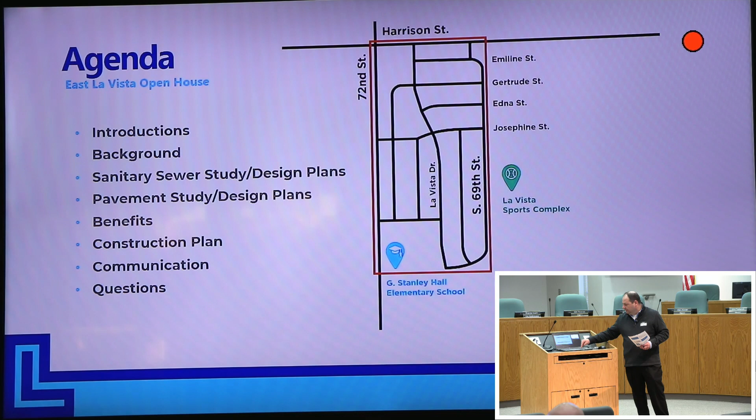As far as introductions go, we have a handful of people here tonight who will be speaking, and others just assisting. From the City of La Vista, we have Jeff Callentine and Pat Dowse, one of our city engineers. With NL&L Concrete, who will be out in the streets doing a lot of this work, we have Chad and Mike sitting up front. We also have Bill Glismann with HGM, one of the design engineers on this project, and Paula Pogie, who will be the project manager and construction manager. With TREKK, who did a lot of the studies for the sewer and pavement, we have Brock. And I am the public engagement moderator.

With that being said, I'm going to hand it over to Pat, who's going to give us a brief introduction on the background.

Thank you, Brian. I appreciate that. Pat Dowse, City Engineer. Thank you again for everybody coming tonight. If you were here in November of 2021, you've probably seen this slide before, and you guys live this slide every day. This was SID number 4, Sarpy County, built approximately 1959 to 1960.

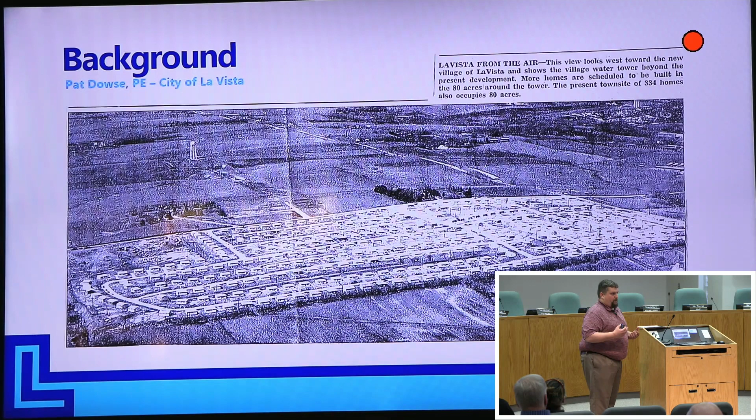As you guys are well aware, it's been there for a few decades. Back in the early-to-mid 2010s is when the city started looking into this and putting it in their program, understanding that the surfacing of the pavement was getting poor. We understood through our jettings and inspections that the sanitary sewer line needed some help as well. So in 2019, we went out for our professional RFP and selected HGM Associates and TREKK Design Group as the design engineers for this project. We went through the study to understand the ins and outs of what the project needed to be.

We understood what the next steps might be, and hired them back in 2021 to do the final design as they worked through. We then met with the neighborhood in November 2021 at 60% design to give everybody an update on the project, show where we were at, and discuss what the next steps were going to be.

So here we go, we get into 2022. The bidding climate was a little less favorable than we were anticipating. We bid it in February 2022 and had no bidders. We bid it again in May and had one bidder, substantially higher than what we were estimating. We bid it again in October and had two bids, which is where we came with NL&L Concrete, who became the low responsive bidder. We have signed them on contract, and they are ready to go.

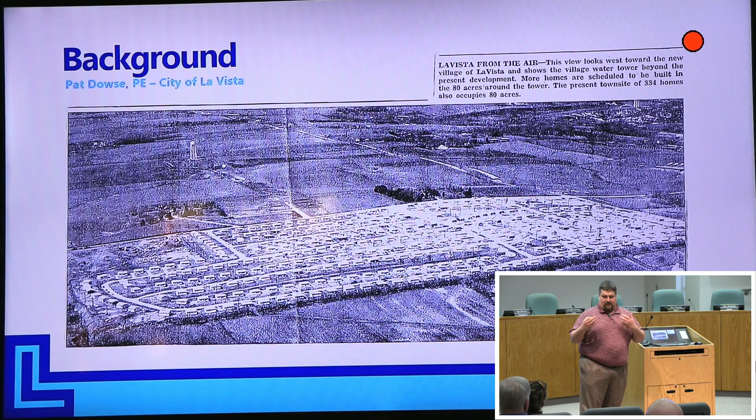But yeah, I think you guys know the neighborhood pretty well—72nd Street, Harrison Street to the north, to the south is G. Stanley to the east is the sports complex. And like I said, as we've explained then and explain now, the goal of this project is to extend the sewer life 50 years and to rehab the pavement.

They'll talk a little bit more about the background. You'll hear some terminology in there—laterals versus public main. The lateral is what connects to the public main, from the main to the house, so that's the service lateral. The main, or trunk line, you may hear that as well—that's the main generally in the middle of the street.

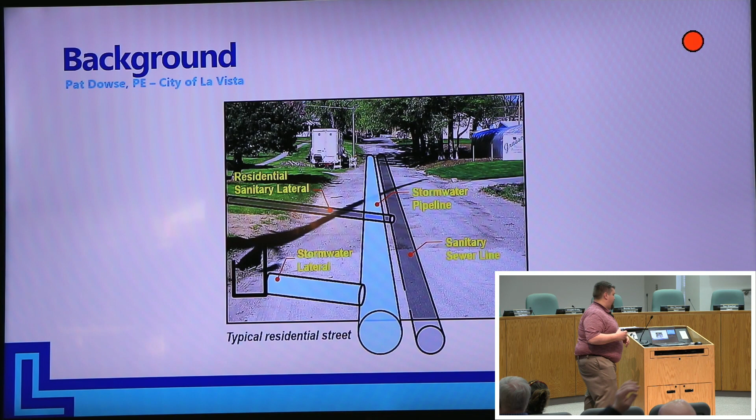I will turn it over to Brock for the sanitary sewer. All right, my name's Brock Beran with TREKK Design Group.

We had a couple of roles in this project. One, we did a lot of the sewer analysis—televising the sewers, inspecting manholes, things like that—to determine the condition of it. From there, we rolled into the rehab recommendations, and then from there we got into the design of it.

As Pat mentioned, there are two types of sewers: storm sewer and sanitary sewer. The way I describe it is the storm sewer, if it rains, goes into the curb inlets and runs right to the river. The sanitary sewer, when you flush your toilet, goes to the treatment plant, gets cleaned, and then into the river. So those are the two different types of systems. This project dealt with the sanitary sewers, and this shows you a map of where everything is at.

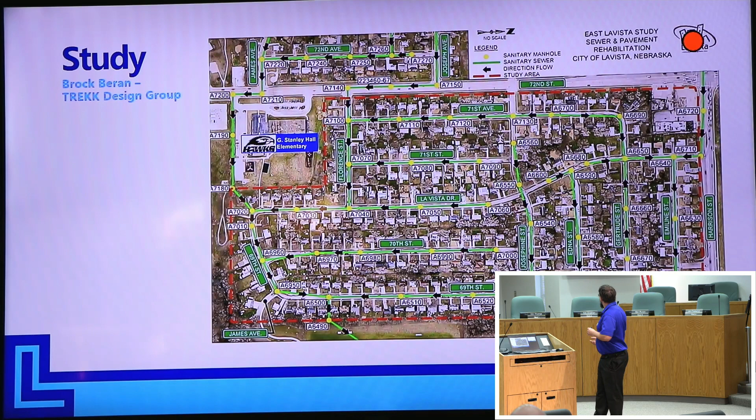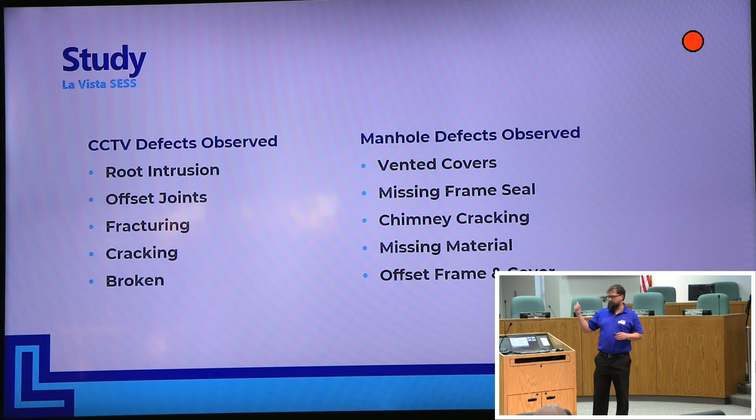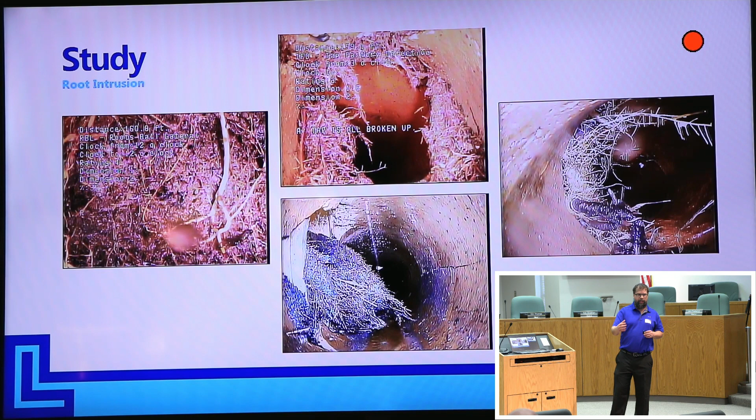What we found during the inspection was just lots of defects—cracks, broken pipe, lots of roots. When we got in there, we noticed a lot of issues with people's laterals where there's roots inside of it. Originally, we weren't going to address those, but once we got into it, we realized it was more severe. So we're taking the laterals out, and we're going to remove and replace them out to outside of the pavement.

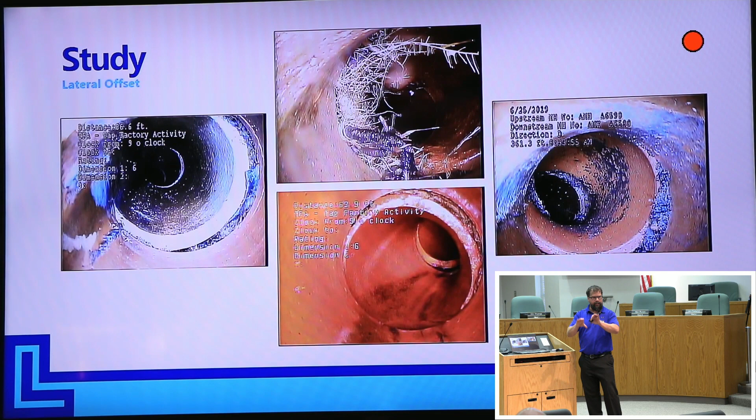So as you can see, there's lots of issues—offset joints, some objects stuck in there. That's somebody's jetter nozzle. Just more of the same lateral defects, a lot of offset joints. Basically the pipes are disconnecting a little bit, so there's offsets there. As you can see, there's cracks and broken pipes, things like that. There's actually a utility that bored through one of the pipes.

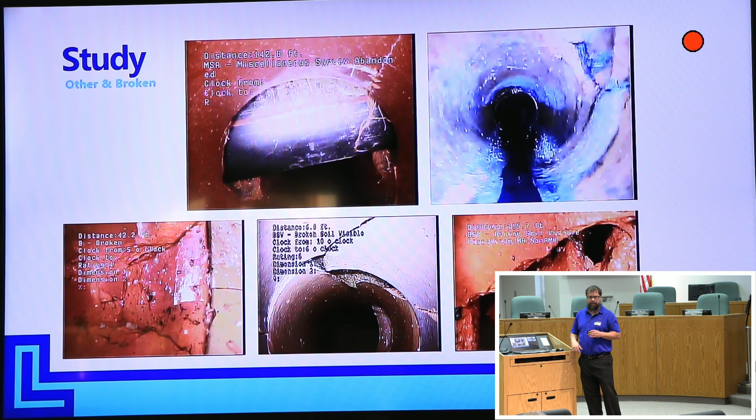So what we have is to address this stuff. Oh, and here's some of the manhole issues—just lots of work that needs to be done to patch those up.

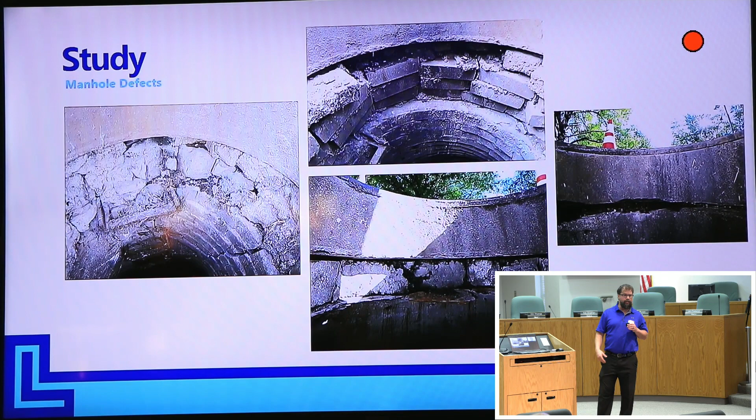What's happening is you're getting I&I, inflow and infiltration—clean water that's getting into the sewer system. So if we can fix those things, that's going to reduce that clean water getting into the system that we're paying to clean.

As far as the design of the sewers, this is kind of more of the same. So what we've recommended is cured-in-place pipe. Basically it's like a sleeve that we're putting in the pipe. If there's cracks or small holes in the pipes, things like this, the sleeve will go inside and reaffirm the pipe integrity—it'll give you that strength. It'll cut out the inflow and infiltration, the water getting in through those cracks, things like that.

So again, we're going to remove and replace the laterals. Your private lateral will be replaced from the main to the outside of the pavement, and then once the pavement's in, we'll come back and line the mains.

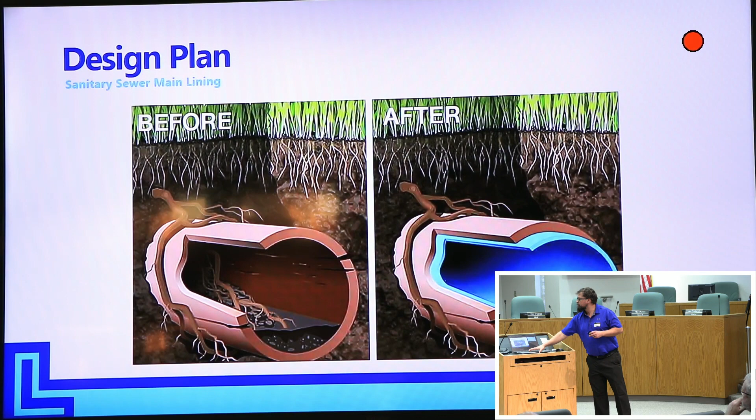So with that, I'm going to hand it over to Bill to talk about the pavement. Thanks, Brock. I'm Bill Glismann with HGM Associates, and we did the pavement study and design for the project.

Initially, we did a study—went through all the streets, took a look at them, used a rating program to go ahead and do that. As you can see here, most of the streets were in fair to poor condition. Actually, this was several years ago, so maybe more of those are poor now.

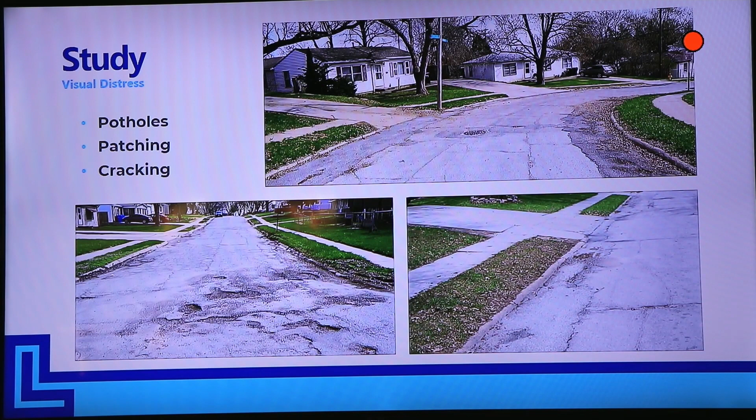We determined what the pavement thicknesses were, and there were some areas where the concrete base under those asphalt overlays is pretty thin too. So in those areas, we were going to actually have to replace the whole street completely to address those issues. Another thing out there is all the ADA ramps and stuff are not compliant with current standards.

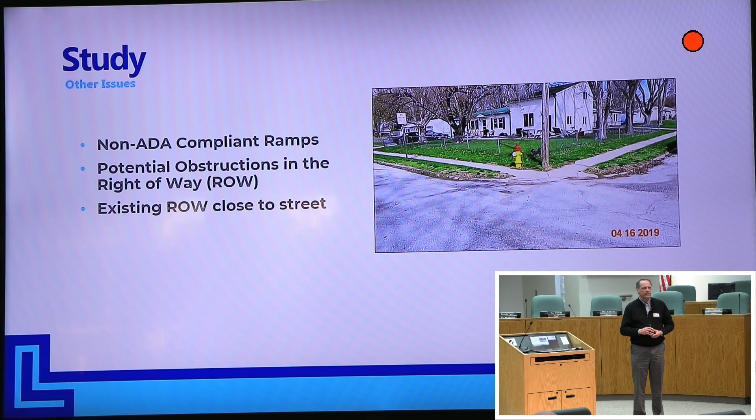As part of this project, we're going to go through and replace all the curb ramps to make those ADA compliant. As you can see, a lot of those are tight to the corner—there are some utilities and stuff there. We tried to configure the curb ramps to not take right-of-way in most cases, but we will end up having to relocate some poles and fire hydrants to do that.

So we're going to tear that pavement out completely and replace it with a new concrete street through there. All the other areas highlighted in red will be milled down to the concrete subbase, so all the asphalt on the roadway will be taken off. We'll assess the concrete base underneath and make any repairs as needed, then come back and resurface with a new asphalt overlay. So all the streets will be upgraded with a uniform thickness and paving.

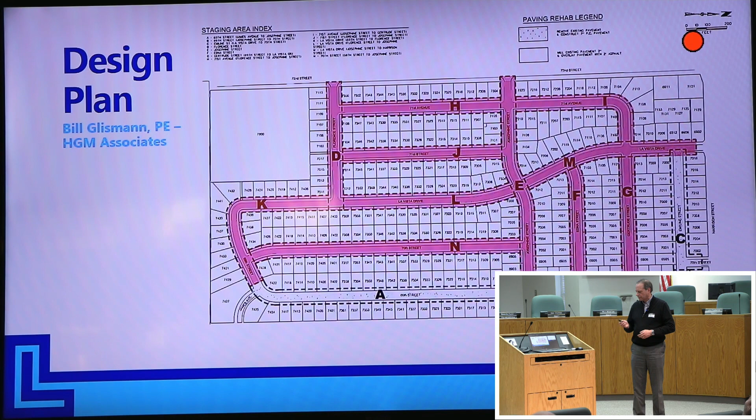And so that's kind of the design plan of how they're going to progress through this as they're working. The first thing they're going to do is remove pavement to do the sewer lateral repairs. They'll cut a trench, replace the sewer lateral, and if they're doing your sewer lateral, they'll do that in one day. So you'll be out of sewer service for a day.

They're going to do maybe a couple houses a day as they progress through there doing sewer laterals. Once they repair the sewer laterals, they'll go ahead and replace the pavement where the sewer laterals were, or fill those back up and put temporary rock in there. They'll mill the streets after the sewer laterals are done, and go back and do the patching, as I mentioned. Then once that's done, they'll do the overlay.

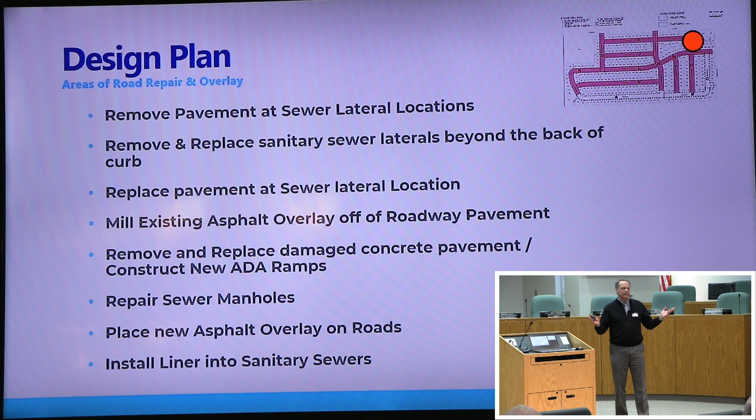And then at the end of the project, they'll go ahead and do that sewer liner. So after all the work has been done throughout the whole area, they'll come through and do the sewer liner. This is on the area that's basically 69th and Emiline.

And in that area, that's where they're going to take out the pavement. So first off, they'll do the same thing, trench out and do the sewer laterals. But then ultimately, after they get through that, they're going to pull out the street pavement completely. We've got some temporary rock surfacing that will be going in to help people get access through this process. We want to keep it as manageable as we can—I know it's going to be disruptive for a time when they're in each of the sections, but we'll try to keep your access to your property as much as we can.

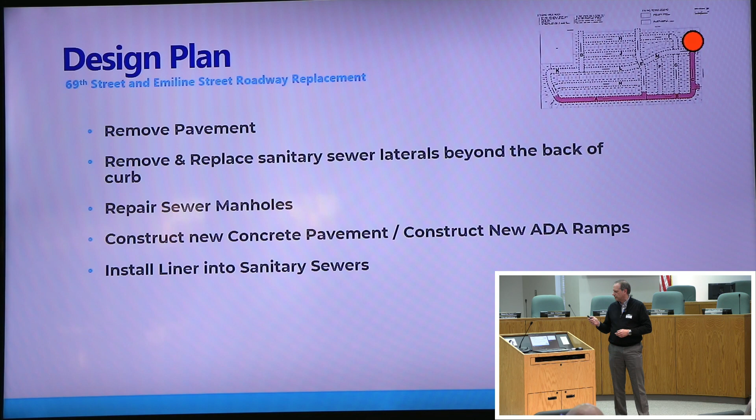Ultimately then, they'll go in and put new pavement in there, and then after that they'll put the sewer lining in. So that's what's happening in those areas.

And as I mentioned, there's also curb ramps and things, and they'll be doing relocations of fire hydrants and relocations of the power poles there—or actually, it's mainly the street lights. There are some power poles that have transmission lines and things on them; those are going to stay in place. It's mainly the street lights at the corners that they'll relocate. So it might be that those get relocated when they're not working on your street. MUD or OPPD will be in to do that stuff prior to us getting into some of those areas.

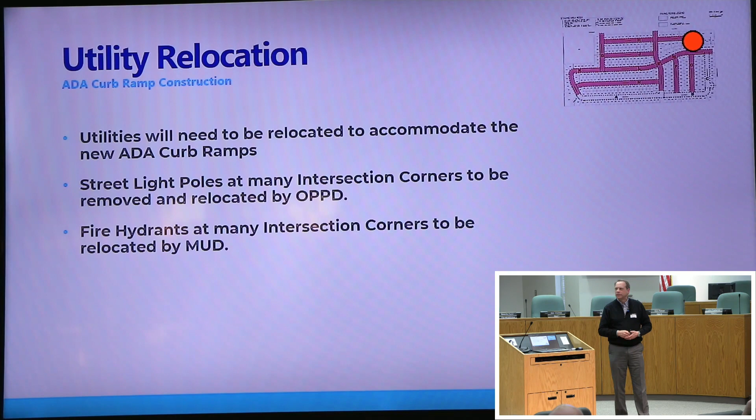So the benefits of that are getting a new roadway in there, new surfacing, so we can extend the life of the neighborhood and you don't have to deal with potholes and things like that over time. We'll get ADA compliant curb ramps, and also lining the sewers, which will make sure the sewer infrastructure is good, with no issues with root infiltration and things like that.

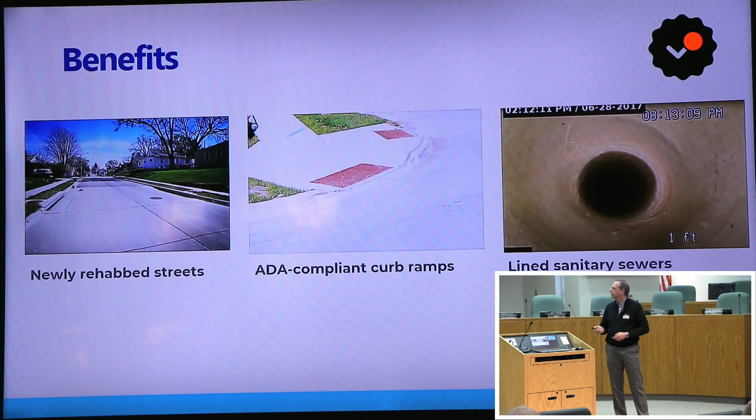So next is the construction schedule, how we're going to get this done. The project timeline is we're going to start next week doing work out there, and that'll begin phase 1 of the improvements. They'll work through November, and by the end of November, they'll have those areas they're working on this year—the sewer laterals done, the pavement replaced, and everything opened back up.

Over the winter, they may be doing some sewer lateral replacements as they go to kind of get ahead of things, but that's all weather permitting. So that may be going on in the winter in some areas. Ultimately, in April next year, we'll begin again on the second phase and do the rest of the neighborhood. So by the end of 2024, the whole neighborhood will be completed.

So here's kind of the construction phases. The red is phase 1 and the blue is phase 2. They're going to start down in area K first, move through N and D, then up through L and M, and finish out with J. That will get about 55% of the pavement done within the neighborhood in that year.

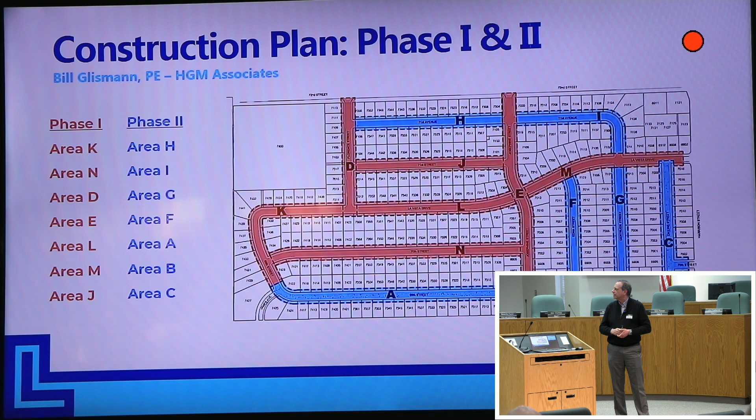Then the next year, they'll start working in H, work down through I, J, or G, F Street, or F, and then up 69th and Emiline through A, B, and C, and get that completed in phase 2.

And with that, I guess on the communication portion.